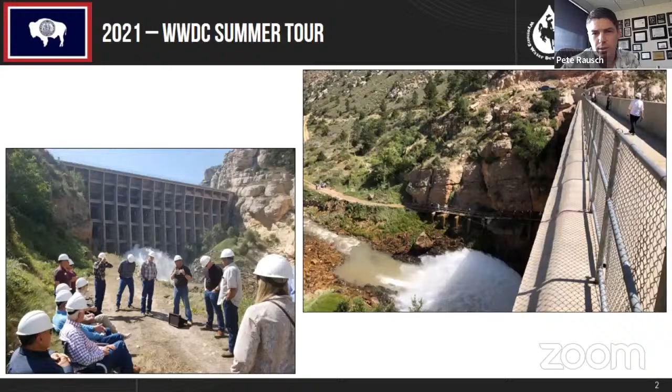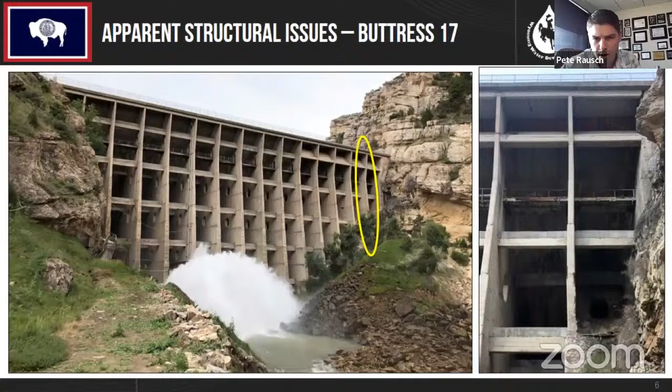So we'll recap real quick where we've come from to get here. It all started when we were looking at rockfall and then noticed some apparent issues on buttress 17 of the dam, circled there on the slide.

We got a closer look at that and discovered a 12-foot vertical crack on buttress 17, which was enough to implement a storage restriction at that time. We refocused all our efforts on a very thorough inspection, which occurred in September of 2019.

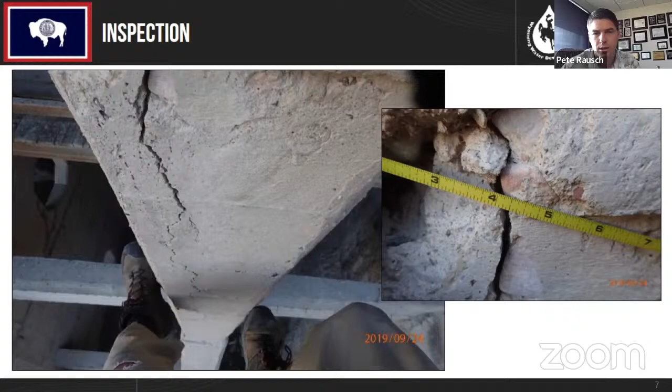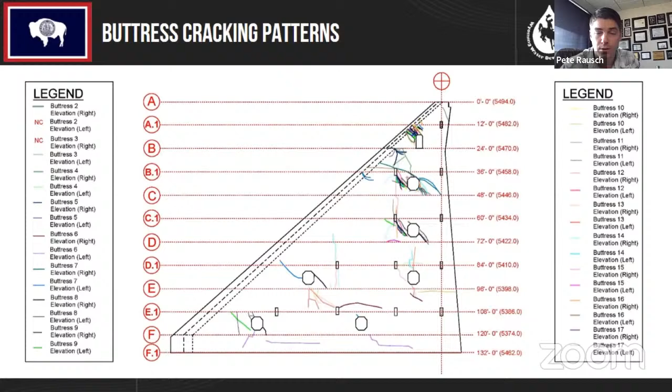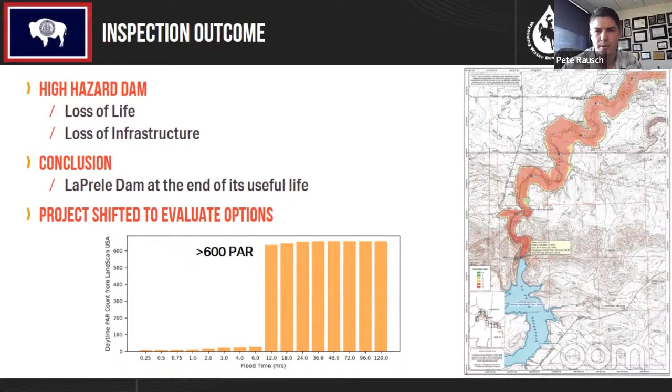Main thing with our concerns on this, of course, is the dam being high hazard due to potential for loss of life, loss of infrastructure downstream in the event of a failure, with over 600 people at risk in that case, ultimately determining this dam's past the end of its useful life.

So we'll jump into some of the design advancement here. Through that analysis of design options, we ultimately determined that a new roller compacted concrete dam constructed just downstream of the existing one would be the most feasible option. What we've been doing since about this time in 2021 has been working towards advancing that design.

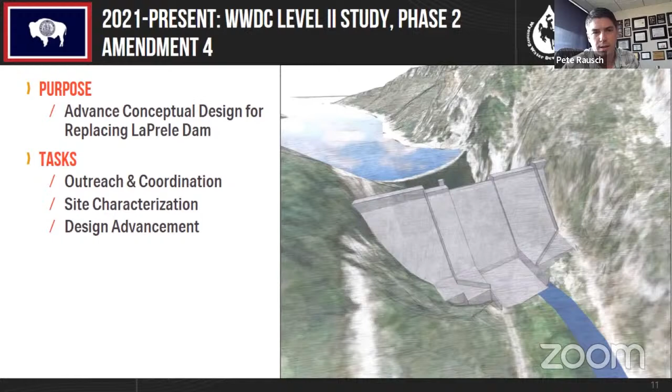So where we left off with the tour, we were just about to get our geotechnical investigation underway. That involved more extensive mapping of the geology, and we had planned a program of 9 different drill holes at the site, as well as some geophysical investigation.

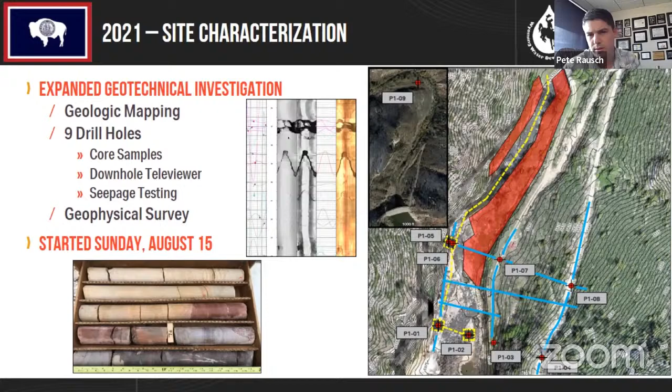Those all went really smooth. Near the end of that in-channel boring, we also got the geophysical team out there and collected those lines, represented on this map by the blue lines. The geophysical survey gives an understanding of what the geology is along those lines, and it was correlated with the drilling that was done.

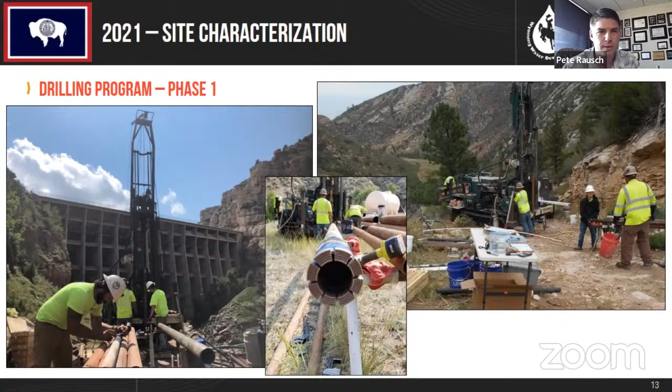And of course, getting into the creek, we hired a contractor to prepare a trail up the creek and prep the pads for drilling up in that area, getting through some tough spots of the creek using these wooden mats. Pretty interesting the way that all played out. You can see there the drill rig moving up the creek—it was actually remote control operated to drive it.

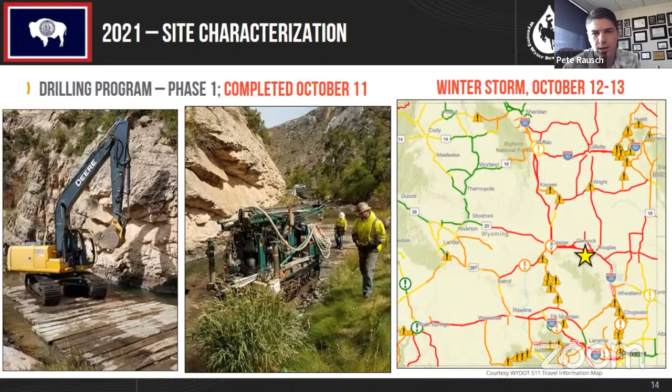So that phase 1 drilling program, we finished up and demobilized, got everything out of there on Monday, October 11th. You might recall that October 12th we were hit with a winter storm that pretty well shut down most of the state, so we got out of there just in time. Really, the drilling program went really well, finishing ahead of schedule and under budget.

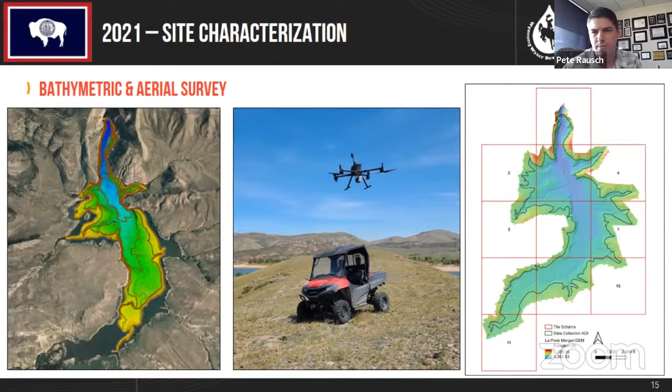Before the tour, in early June, we had done a bathymetric survey using sonar from a boat on the reservoir. Then at the time of the tour, we were out there collecting LiDAR, everything outside and above the water surface elevation. We combined those two data sets to produce the map you see on the right, giving a good updated understanding of the bathymetry and volume of the reservoir.

We also did a thorough LiDAR and imagery scan of what we're looking at here, the West Canyon wall downstream from the dam. This is a critical area, as it's where we'll be tying in the left abutment of the new dam, in the area labeled middle bump and north bump. So really, characterizing that geology, understanding the direction and characteristics of the different jointing.

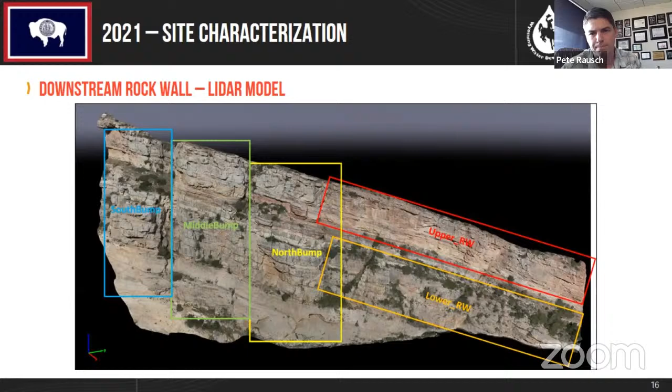With all that information collected, we're moving the design forward. We're at the point today where we've just delivered draft design documents for what we're calling an appraisal level design, about 10%, which is what we've been shooting for. We're delivering a report on our basis of design, the geotechnical data report, everything we did with hydrologic routing and analysis that went into designing the spillway and outlet works, our structural analysis reporting, and a cost and constructability update.

Taking a moment to look at the image on the slide, it's an updated rendering of the appraisal level design. In the middle of the channel, the big main spillway is sized to pass up to a 1,000-year event, about 25,000 cubic feet per second. Anything above that, we're designing for up to the probable maximum flood, making sure the dam survives. So anything above the 1,000-year event, we're looking at overtopping on either side of that main spillway.

On either side we have what we call training walls, to redirect those overtopping flows and make sure everything is directed towards the middle of the channel downstream. The interesting feature, especially on the main spillway, is how it looks like a ski jump, and that's intentional. It's called a flip bucket design. With larger flows, as the water comes down the spillway, it gets launched away from the toe of the dam, which helps dissipate energy and keep scour away from that toe.

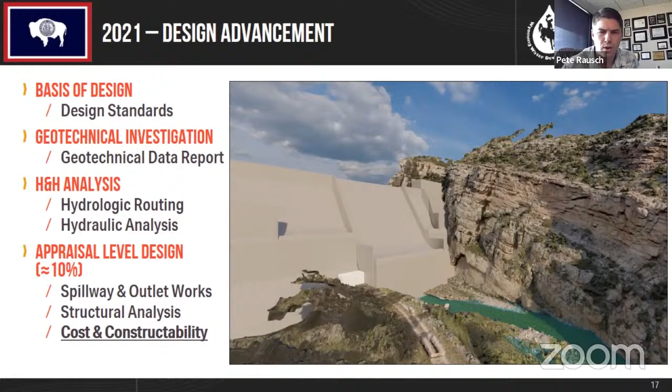Back to cost and constructability, mainly cost. We had done some very preliminary cost estimates for comparison at the time of the design options analysis. Going back to where that left off, specific to this RCC dam option, we updated everything based on our current design and brought those costs forward to 2022. Where we sit right now, our cost estimate is 84 million for the dam, including construction, non-contract costs, some design and management of construction, as well as some contingency at this point.

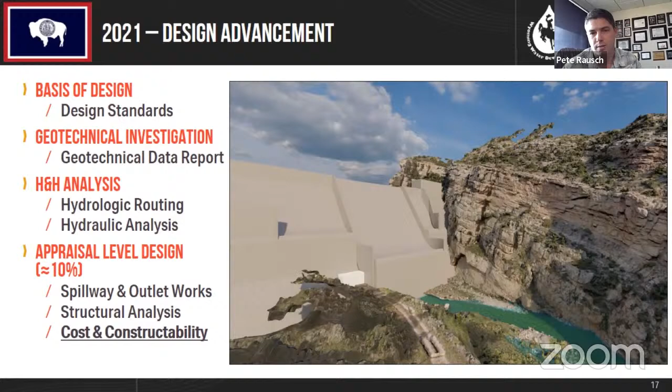What's worth noting is, bringing those costs forward from August of 2020 to now, using the Bureau of Reclamation's cost escalation guidance, the escalation over those 1.5 years is 15%, which is very notable because typical would be in the range of 2 to 3 percent. There's a lot of uncertainty, as everyone knows, around costs and inflation and where things might go. But ultimately, our updated cost for construction of the dam today is 84 million, with a range of confidence from 67 million up to potentially 112 million.

Now, looking ahead to next steps with the dam, not only water development, but also the state engineer's office has a contract with HDR to evaluate risk, not just at the LaPrele Dam, but it is one of the main focuses, understanding risk at the dam and looking at any mitigation that may be recommended through that.

That's getting going here. And then specific to water development efforts and what we're looking at for 2022, with some of the remaining budget saved from the geotech investigation, as well as the discretionary funding, we're moving ahead with a site-specific seismic study.

That's really our next critical item as we move forward with the structural analysis and design. Some work has been done by the Bureau of Reclamation, looking at Guernsey and Pathfinder, but there's too much of a gap in that data, so the design team decided we really need to fill in that gap with a site-specific study.

That is just getting started. And then, of course, we're looking ahead for additional geotechnical investigation this year. I'm calling it our phase 2 geotech, building on what was done last year, trying to fully characterize the foundation and understand the geology at the site.

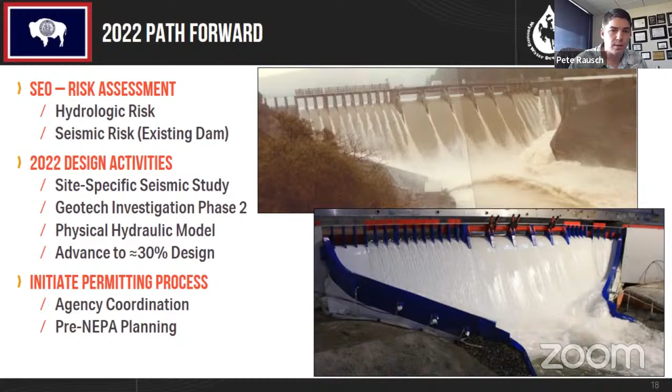Go ahead, next slide. But really, that's the end of the update. I'd be happy to answer any questions.

Anybody have any questions or comments? Is it Pete, right? Is it Pete? Pete, yeah. I guess there's no questions.

So, Jason? Mr. Chairman, I would just add, Pete mentioned the upcoming work we're planning to get accomplished here, such as the phase 2 geotech and potentially getting into 30% design. So that's a bit of a precursor for what you might be seeing in May to add to their contract for continuing forward with this work.

I would say that we're trying to balance what we're doing here in regards to spending state funds and still trying to figure out from the Infrastructure and Jobs Act, there's some legislation in there that I think was specifically written for LaPrele Dam, even though it's not specifically stated that way.

And the governor's office has submitted a letter to the Bureau of Reclamation per the requirements of the act, the language in the act, and we're waiting to hear back from them on what this funding potentially is going to look like. So we've heard some positive feedback from our congressional representatives that have helped us with that, as well as the Bureau of Reclamation.

So we're, like I said, trying to balance moving the project forward, but also taking advantage of that federal funding as soon as we can, assuming it comes to fruition here.

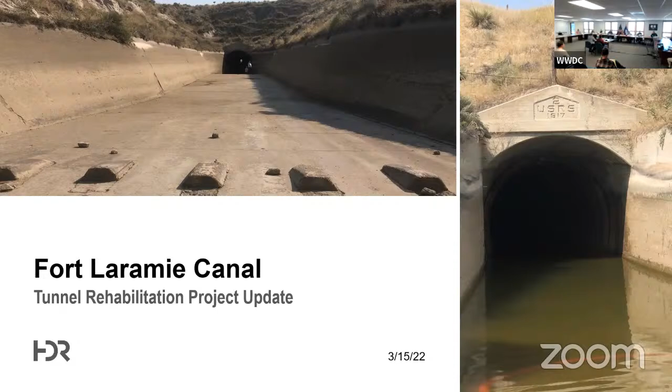So when we came in, there had been a lot of work that had been done the previous 2 years. So we wanted to compile all that information in a way that was usable to help guide the decision-making process for both the Goshen Irrigation District Board and the accompanying board on the Nebraska side, Gering Fort Laramie.

We did that by conducting, following water development procedures, a feasibility analysis kind of equivalent to a level 2 feasibility study through water development. This was to evaluate the options available for rehabilitation, to provide information to help guide the decision-making process. Ultimately, we wanted to make sure that we met any operating criteria for water development if and when it was approved or possible to move forward with a level 3 project with your commission.

So we did this using a multi-criteria decision analysis tool. The purpose of that is you rank each of the options on 3 independent factors: the first being non-economic criteria, the second being the capital cost of what it costs to construct in today's dollars, and the third is a life cycle analysis that looks at depreciation over time, as well as operation and maintenance costs into the future.

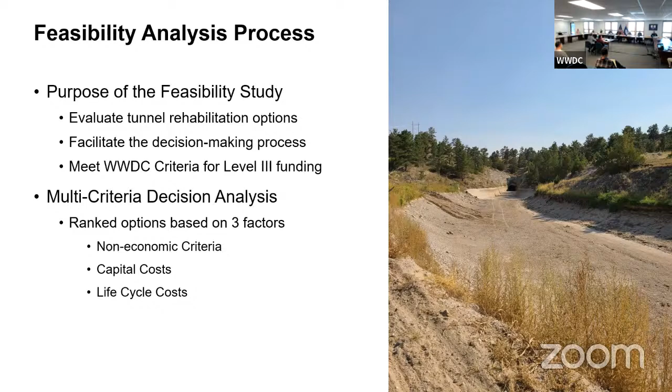So ultimately, in that multi-criteria decision analysis tool, we ended up ranking 6 different options. I want to clarify that there were a lot of other options that were evaluated, considered, and discussed, and these were deemed to be the top 6 most feasible options.

So just because they're not listed here, other options, in particular different tunneling technologies, were evaluated and ranked against each other, and these are the 6 that made the final cut to go into the final evaluation and ranking process. These 6 options really fall into 3 different categories: repair, replace, and removal options.

The first being a steel liner option, which is putting a structural replacement option or liner inside the existing tunnel liner, which would shrink the diameter slightly. Similar to that, but a different technology for replacement, the second option is a carbon fiber reinforced polymer technology. That's again a repair type option.

We evaluated 2 different replacement options using a sequential excavation method, essentially putting in a new tunnel. The 2 options for replacing the tunnel would be to put in this SEM tunnel on alignment, going through the existing tunnel opening, which limits the amount of material you'd have to excavate, but would remove all of the infrastructure currently in place, which is part of the infrastructure that failed back in 2019. The other option evaluated is putting a new SEM tunnel off alignment, to one side or the other, so you have a brand new tunnel at the end of the day.

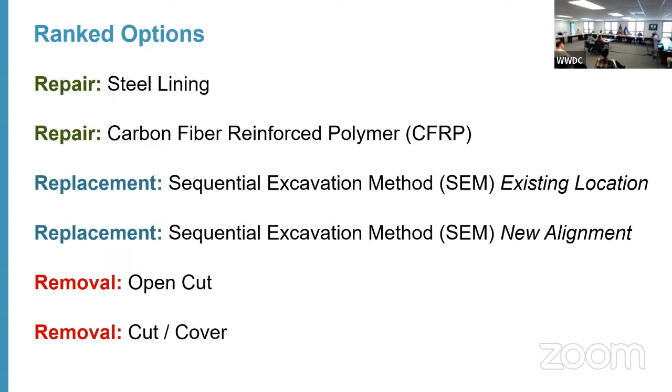So just to focus a little bit on the non-economic criteria side of things for just a moment, it's kind of a 3-step process. The first step, and this process we did to perform this work to develop the non-economic criteria, was done in conjunction with both Goshen Irrigation District and Gering Fort Laramie together. We had a 2-day workshop here in Cheyenne in December to get input from all affected parties. The first step of that process was to create the ranking criteria for the non-economic ranking.

And those are what are shown on the screen right now. Those 6 categories were operability and maintenance, constructability, risk and consequence of failure, hydraulic capacity, permitting, and public safety.

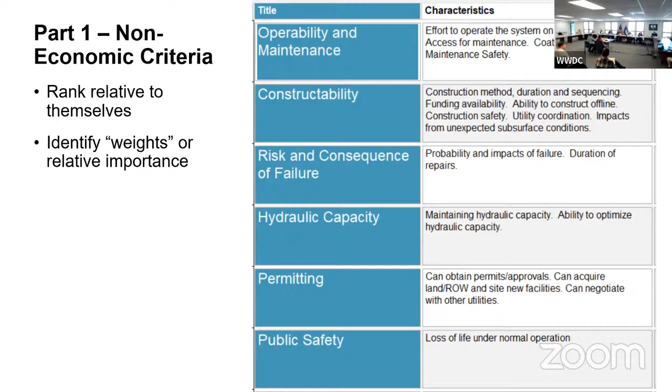Next slide. The second step in the process, though, is that not all of those ranking criteria are deemed even or equal. So you have to rank and weight each of those criteria against each other. This was a big focus of the workshop we did collaboratively.

So once the 6 factors were in place, we had the weighting factors for each of those 6 factors. We took the 6 options that I previously mentioned and assigned a score, essentially a 1 to 5 score. We have words on the slide that correspond to it, everything from a very low score, equivalent to a 1, up to very strong, which is about equivalent to a 5.

We did that through each of those 6 options to come up with the total non-economic ranking, and those are the scores shown in the right-hand column. As you can see, there's a couple that were fairly close. The open cut option, based on the non-economic criteria, actually scores as the best solution to move forward with. However, an SEM enlargement through the existing tunnel ranks right behind it—they're very, very closely together.

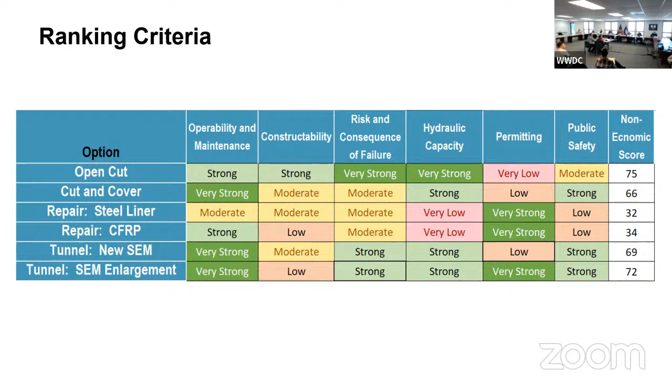So if you go to the next slide. After we had that process completed, we spent some time evaluating the preliminary design and coming up with the capital cost estimates for each of the 6, and we also performed the life cycle analysis. Those were the other 2 pieces of information important in this process. This figure displays each of those pieces of information to help you visualize what we're looking at.

The non-economic criteria score is the x-axis, and you want a high score, so you want something on the far right-hand side. The life cycle analysis is shown on the y-axis, in net present value as the units—that's the life cycle costs in terms of today's dollars. So you want to be low on the scale on the y-axis.

So what you're really looking for are the options that plot lowest and farthest right. You see 3 of them that are fairly close together: the SEM new tunnel alignment, the SEM through the existing alignment, and the open cut options.

The last piece of information, and one that's very important I think to everybody in the room, is the capital cost—what does it cost to construct now? That is represented on this figure as the size of the diameter of the bubble, or the dots you see there. If you look at it, you start to get 2 that overlap: the blue circles are the SEM new tunnel on alignment and through the existing tunnel, and the open cut, which is the green dot, which is removing the tunnel and all the material above it.

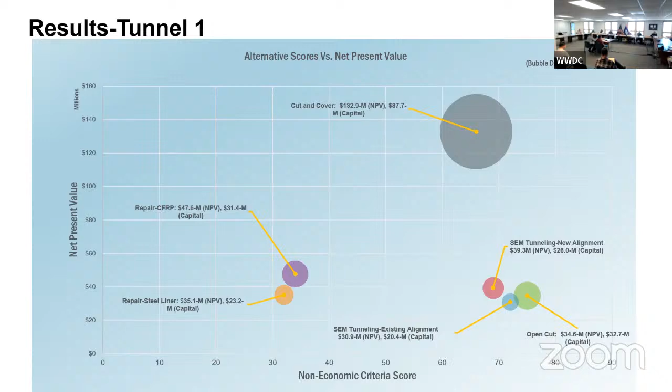If you look at it, while the open cut scores a little bit better, the SEM option has a lower initial capital cost. For tunnel 1, our preliminary estimate for the open cut option is about $33 million, 32.7 is the number on the slide, whereas the SEM tunnel through the existing tunnel comes out to be 20.4. So about $13 million less.

We also repeated the process with very similar results for tunnel 2. Again, SEM is slightly cheaper, and the scores on the non-economic score are very closely linked together.

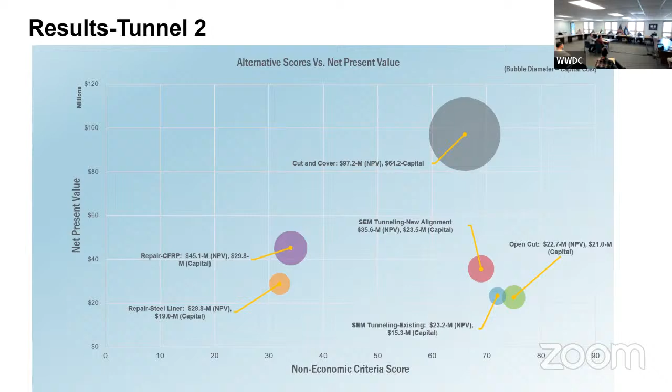So ultimately, that led to the board meeting right about a month ago today, where the boards came together. We presented all this information through a series of stakeholder meetings, both in Nebraska and in Wyoming, and then attended both board meetings for Gering-Fort Laramie Irrigation District as well as Goshen Irrigation District boards, presenting all this information. This was the decided upon path forward.

As Kevin mentioned at the beginning, it was a unanimous decision by the board, which really shows we have a clear path and desired path forward. That recommendation was to advance the SEM tunnel replacement on alignment, with optimization from open cutting, possibly shortening the tunnel or enlarging the diameter slightly, just to get the most optimized, cost-effective solution to move forward.

By going with SEM as the preferred method, it maximizes the value, the efficiency on cost and performance of the tunnel. The real driving factor is that SEM minimizes and mitigates potential risk that the open cut presents, related to potential permitting when you're disturbing the surface to that level.

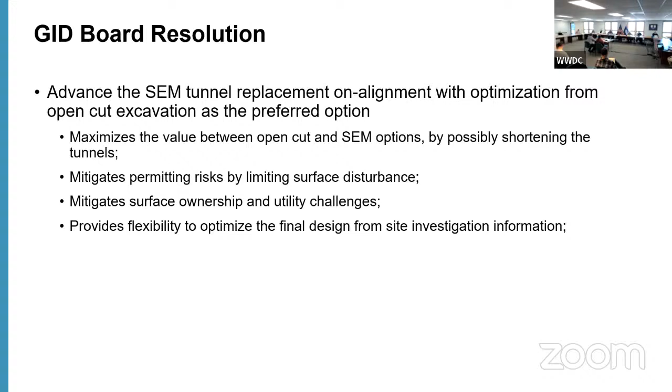So we're in the process of writing that up right now. It's similar to a level 2 feasibility report, and we're looking at the next steps forward. As we hope to move into a design phase, the next steps would be to perform site investigation, similar to what Pete just talked about on La Prele. There's a certain level of topographical survey, geotechnical drilling, some in-tunnel surveys and scans, and ultimately some geophysics, both from the surface and the tunnel, to really understand the material the existing tunnel is in and identify any void spaces, which is very important for the constructability aspect of design.

In addition to site investigation, we will be creating a computational fluid dynamic model to help us understand the hydraulics and how water will flow, the functionality of the tunnel. That information from both the site investigation and the modeling aspect will ultimately be used to design the tunnel replacement option.

This summer, we hope to continue conversations with the agencies. We've been meeting with the federal agencies, and there are actually 3 federal agencies involved: the Bureau of Reclamation owns the tunnel, the BLM owns the surface at both tunnels, and there's also the Fort Laramie National Historic Site, so the National Park Service will have a voice in the review process for any permitting. Conversations have already been had between the agencies, and we hope to continue that and advance into a NEPA process, hopefully later this summer.

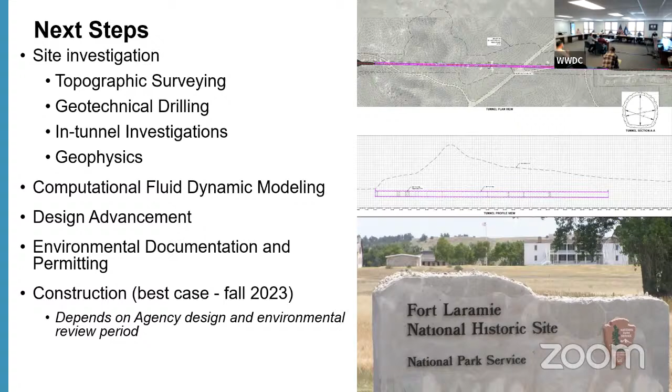And with that, I think that's our update for today. We'll entertain any questions—anybody have any questions or comments?

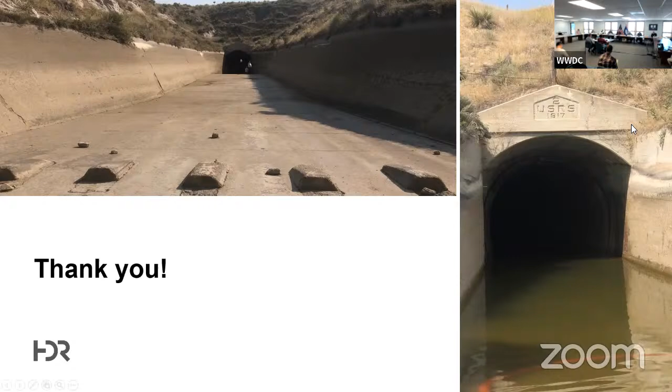Thank you. Appreciate it.

Excuse me, Mr. Chairman and Commissioners, one more quick update. I guess I was anticipating a question as well. As Jason mentioned in the legislative update, in the supplemental water funding bill there was $21.8 million. Jason will have to get the details right for me, but if you add up the numbers I presented, it's about a $45 million estimate. So that supplemental bill equates to about half of that.

That's because, as I mentioned, Gering-Fort Laramie owns 51% of the irrigated land served by this canal, and as such they are required to pay 51% of the bill. There is currently legislation moving forward in Nebraska. Their session is a little longer than ours here in Wyoming, so they have a couple months to go. But funding for the Nebraska portion of the rehabilitation, their 51% of the $45 million estimate, has been identified in the governor's budget as one of his top 10 priorities. That legislation has been introduced, has passed through appropriations, and is now, I believe, on the House floor. Their process will take a little longer, but so far all the stars are aligning that they don't anticipate any pushback. So things are looking good to have approval of that bill through the legislative process in the next month or so.